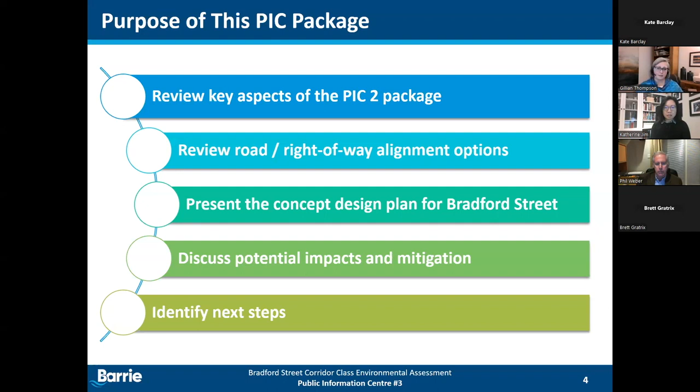So what is this study about? This project reimagines Bradford Street as a future multimodal corridor within the Urban Growth Center. The long-range planning study will confirm and protect the right-of-way required to provide more attractive, accessible, and sustainable transportation options.

These include improved sidewalks to enhance safety and accessibility for pedestrians and mobility device users, new in-boulevard cycle tracks for all ages and abilities with connectivity to the mobility hub and GO and the broader cycling network, traffic operational improvements to enhance safety and opportunities for transit priority measures, and a streetscape design to create a vibrant and attractive street environment that encourages active use.

Given the long-range nature of the study, there are no immediate capital works planned. This project is about protecting enough right-of-way space that the street can serve the needs of the future community to 2051.

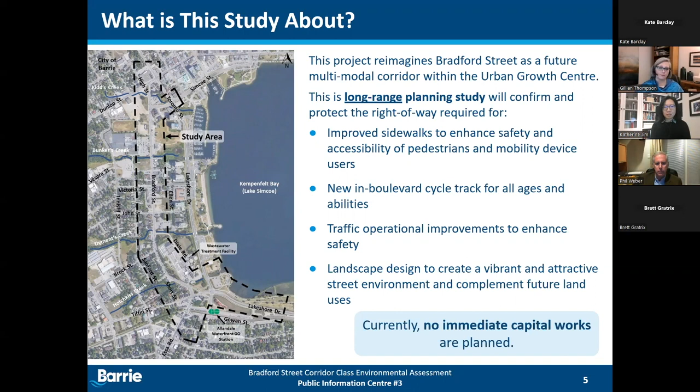The study framework we use here is called the Municipal Class Environmental Assessment, or Class EA. It's a planning and approval process for municipal infrastructure that follows Ontario's Environmental Assessment Act. There are 4 study phases with public, agency, and Indigenous community engagement embedded through the process.

We've moved through phase 1, reviewing the study background, the planning and policy context, and identifying needs and opportunities. In phase 2, we considered alternative solutions to address the needs and opportunities, and we presented all of this information and the decision-making in PICs 1 and 2 in January and June of 2022, respectively. We're now completing phase 3, developing the design concept, and then moving into phase 4, the preparation of the study documentation.

In early 2023, we'll be reporting to Council. We'll be reviewing the study recommendations with Council for their consideration and acceptance. There's an opportunity at that time for members of the public to request delegation status at the Council meeting.

The date of the meeting hasn't yet been set, but it will be advertised in the newspaper and posted on the project webpage. For those who've requested to be on our project mailing list or who have registered for any of the PICs, we'll notify you via email. Pending Council acceptance, a notice of study completion will be issued, and the environmental study report will be available for a 30-day public review period beyond that.

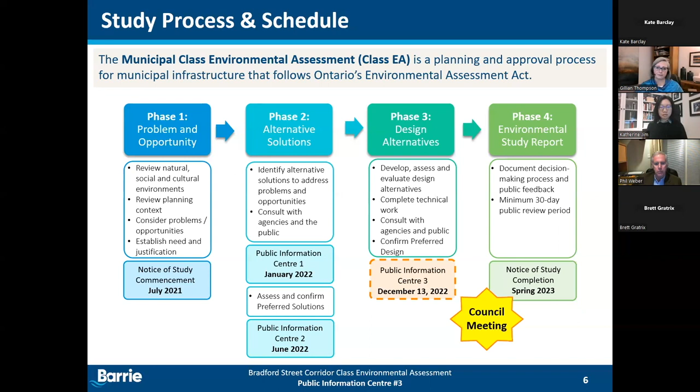The next few slides capture some of the key aspects that were presented at PIC2 in June and provide important planning context for the decisions that we've made since then.

As I said earlier, Bradford Street is transforming and there are numerous approved and proposed developments with more applications to come, and the city expects that the majority of the corridor will be redeveloped. The city's official plan designates lands abutting Bradford Street as high density with minimum building height of 12 stories and ground floor retail and commercial uses.

Bradford Street is the primary transportation link within the urban growth center and is being planned as a complete street that will be integrated with the future community and provides mobility for all users: transit riders, pedestrians, cyclists, mobility device users, and drivers. Overall, we will see Bradford Street shift to a more pedestrian-friendly environment, enabling people to live and work within a walkable community with easy access to public transit to encourage less vehicle use.

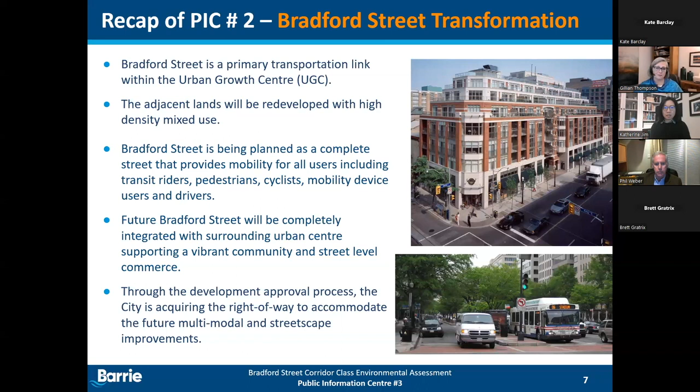At PIC2, we talked about the list of potential planning solutions that we considered to address the needs of future Bradford Street. We looked at do nothing, access management, operational improvements, multimodal improvements on Bradford Street within an expanded right-of-way, reduced travel lanes, and improvements within the existing right-of-way.

And lastly, we looked at the possibility of addressing community needs by improving other corridors. Our recommended solutions were to manage access, improve traffic operations, and expand the right-of-way to address multimodal needs and align with the vision for future Bradford Street as set out in the official plan and the transportation master plan.

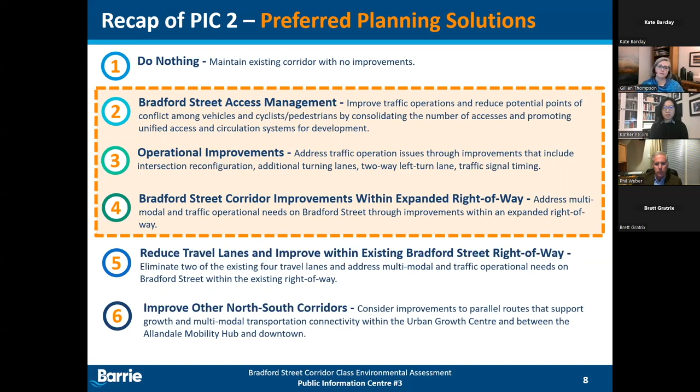Why these solutions? Well, we're demanding a lot from Bradford Street in the future, and we need enough space to accommodate boulevards, cycle track, and accessible sidewalks, street trees, planters, and other landscape opportunities, street furniture, benches, bike racks, pedestrian scale lighting, improved transit stops, future transit priority measures, operational improvements like turn lanes at intersections, and required setbacks for the hydro line and other utilities.

And our recommendation at this time provides the greatest flexibility for the city to respond to emergent technology and changes in travel modes and provision of additional amenities over the next 30 years. So while maintaining 4 lanes now doesn't preclude future decisions to reallocate space within the right-of-way.

And what does that mean? It means in 30 years from now, if we see the shift to active travel and transit that we're hoping for, the outside lanes could be converted to on-street parking or electric vehicle charging stations or an expanded flexible public space. We know that the city may consider a business case for a higher order transit network that includes Bradford Street.

In its upcoming transportation master plan due to start in 2023. So again, we want to maintain that flexibility for future decision making in this corridor with our recommendation.

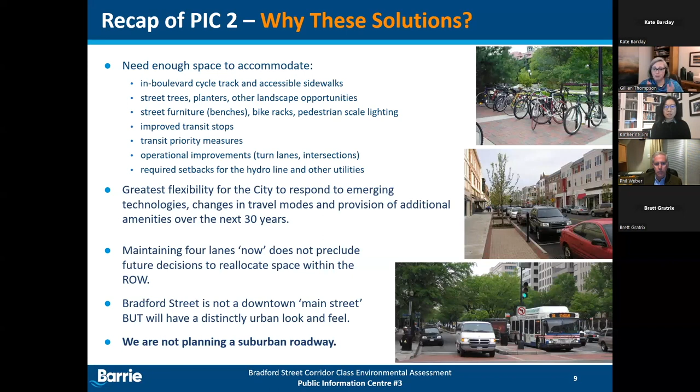So with that point, at PIC2, we introduced sketches of how future Bradford Street could look. And this is one of those sketches. We introduced this conceptual road cross-section to take a closer look at each of the elements that make up the right-of-way requirements. So Kate, this is a bit of an animation.

So let's add the sidewalk, setback, and buffer. Thank you. Now let's add the cycle track and then the boulevard and curb.

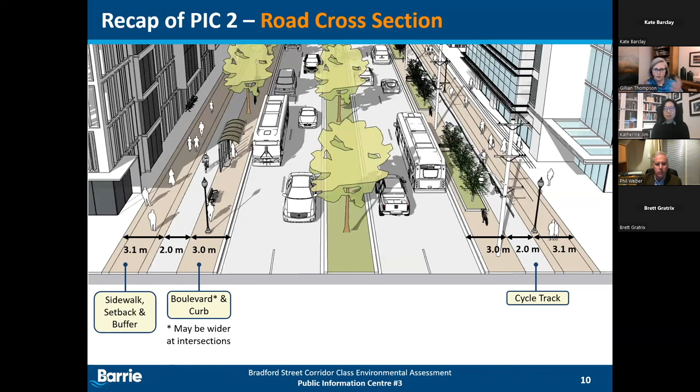Great. The boulevard space will be occupied by those street furnishings, landscaping, the hydro line, transit stops, and pedestrian scale lighting, and those all contribute to the vibrancy of the off roadway areas.

Now let's add the travel lanes. We've accounted for a narrower inside lane and wider outside lane to better accommodate transit vehicles. And finally, the median area is an opportunity for street tree plantings mid-block with space for turn lanes at intersections.

As you can see, we are illustrating the hydro poles, and we've met with Alectra to talk to them about the project. The city may, in time, explore the feasibility and cost implications of burying the hydro. This isn't a decision that we'll make in this EA, but it will be something that's considered in future and in the context of land redevelopment.

In PIC2, we also reviewed the options for the Tiffin Street intersections at Bradford Street and Lakeshore Drive. Alternative 1 involves some reconfiguration and improvement while maintaining signalized intersections. Alternative 2 considered a pair of roundabouts with a mid-block pedestrian cyclist crossing to provide that connection to the mobility hub and GO. Each alternative offered distinct benefits and challenges to different road users.

With all things considered, and in this particular context, we believe the signalized intersection design is slightly preferred because it's perceived by pedestrians, cyclists, and mobility device users as being more familiar, easier to access and navigate. It provides more direct routing for those active and mobility device users, and generally better accessibility for the hearing and visually impaired. It's also more compact and more desirable from a human scale perspective, especially given the intensification and redevelopment that's going to occur around this area.

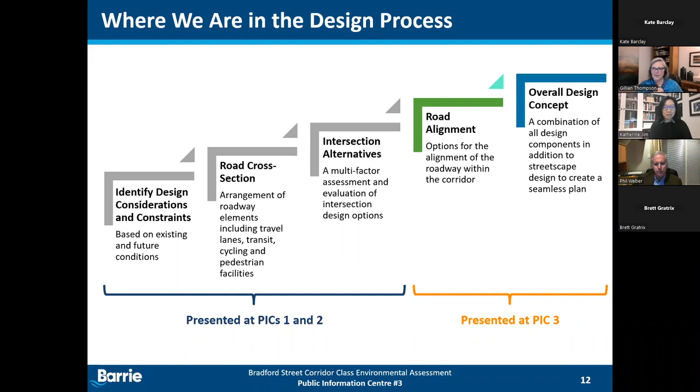Great, thanks, Gilly. For the proposed improvement on Bradford Street, we have assumed that our expanded right-of-way is going to occur largely around the center line of the road, to offer a balance to potential property impact on either side of the road itself.

Now, there are some localized constraints that we do need to respect, such as no impact to the wastewater treatment facility, and some of the development plans may be in more advanced stages as well. So in those cases, the expanded right-of-way may be shifted to one side of the road, and you'll be seeing that later in the presentation.

Also note that we have applied the typical cross sections that you saw in earlier slides. But in the future, the city may decide to look for opportunities for slightly narrower cross-sectional elements in constrained areas. Again, for the purpose of the EA study, the proposed property line is shown for the 34-meter right-of-way, to allow that flexibility for the city to make minor modifications in the future as required.

Now, one of the focus areas within our study area is in the south end, around the Tiffin Street intersection. As you saw in an earlier slide, we evaluated between a roundabout and a signalized intersection, and we're proceeding with the signalized intersection option.

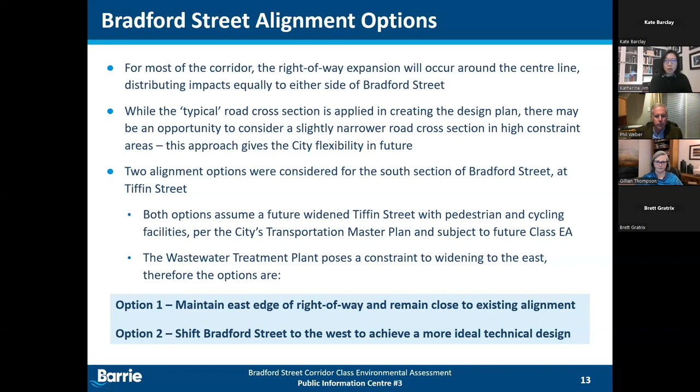Option one is to maintain the easterly edge of the right-of-way, staying close to the existing alignment of the road itself. Option two, we're looking at potentially shifting it to the west to achieve a more ideal technical design.

Currently, Bradford Street is posted at 50 kilometers per hour, and it is assumed to remain the same in the future. Recognizing the urban nature of the corridor, we have assumed a design speed of 60 kilometers per hour, which is typical design standard, generally 10 to 20 kilometers per hour above the posted speed. That means we're applying a set of design parameters in terms of the curve on the road and the associated sight line for this particular design speed.

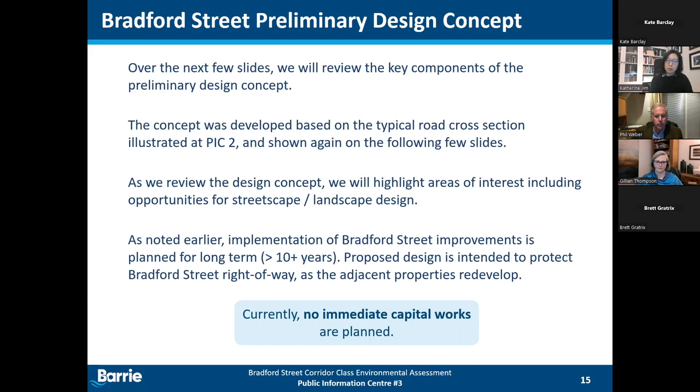As we know, there are many ongoing active developments in the adjacent properties. If we don't take the opportunity now to identify the property protection, there may not be enough space in the future to give the city flexibility in implementing amenities in an urban corridor, again, as you saw in the previous cross-section. So with this, I'm going to ask my colleague Kate to bring up the design concept plan.

This is the design concept plan from a high level for the improvement on Bradford Street between Tiffin Street and Dunlop Street. This is a top-down view, and later on we'll zoom into the corridor itself. This is just an overview to highlight some of the colors and what they mean.

On the plan, the future development plans are shown in red hatching, based on what we found on the city's website. They're all in different stages of approval, but this shows that the corridor is very active and more development plans may be coming.

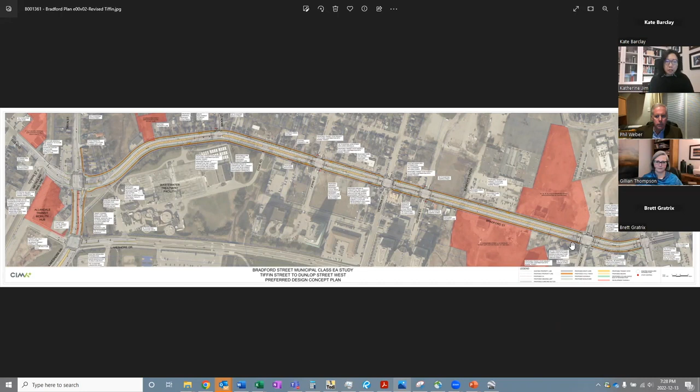In the middle of the plan, the gray area and lane marking shows the 2 lanes in each direction, same as existing, generally keeping with the existing center line, other than at the Tiffin Street intersection area, where there will be a shift to the west, as discussed earlier.

As a concept, shown in the typical cross-section, there may be a median provided in the middle of the road, shown in yellow, where landscape elements may be provided. This is conceptual only and will be subject to future development application and approval on access management.

The boulevard on both sides of the road are essentially new elements. As you zoom in, you'll see the concept includes a 2.5 meter boulevard space in light green. Behind the boulevard is a 2 meter cycle track in orange, and the sidewalk is adjacent to the cycle track on the outside. The boulevard space, cycle track, and sidewalk are on both sides of the road.

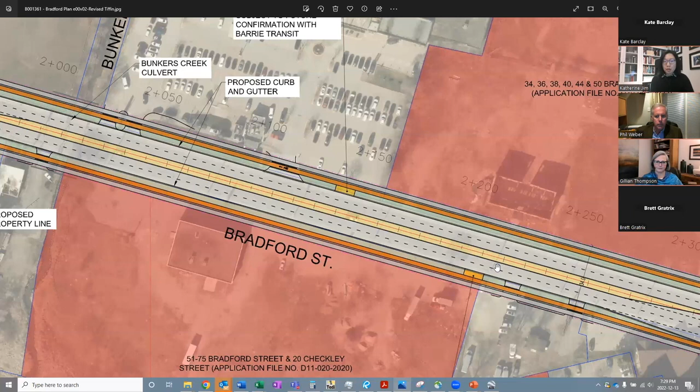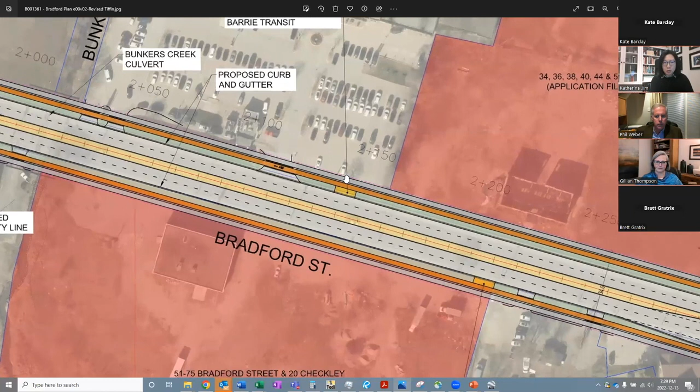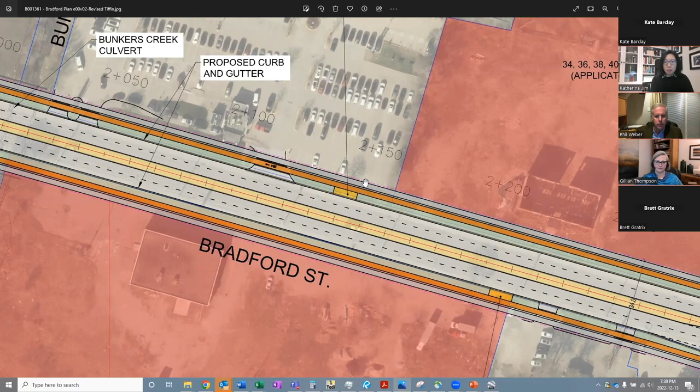You'll see the existing property line in blue, and the proposed right-of-way line marked in a dashed pink or purplish color. The land between the two lines reflects area required for the expanded right-of-way and these new elements. I'm going to walk through the main features starting from the south end of our study area at the Tiffin Street intersection.

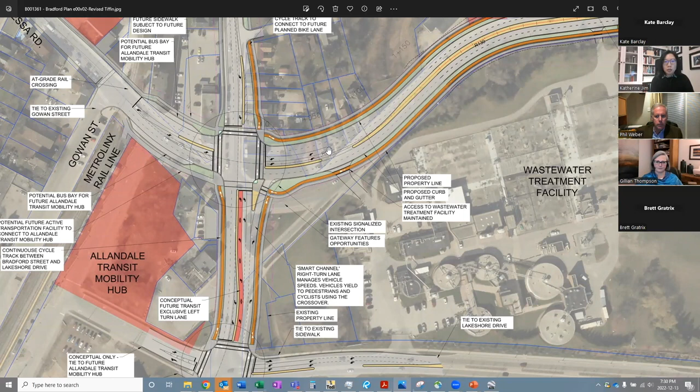Starting at the Tiffin Street intersection, we already talked about the shift to the west. In the southbound direction, we're providing a double left turn, and you'll see the transition of the cycling facility on Bradford Street to a multi-use path on the west side of the road, and a sidewalk on the east side. To orient ourselves, north is to the right of the page, south is to the left, east is the bottom, and west is the top.

At this intersection, we have space allocated for cyclists to park and wait for the correct signal to cross. If you zoom into the intersection, you can see the small green space protected for cyclists when they cross the road—this is where they can park and wait for the right signal before crossing.

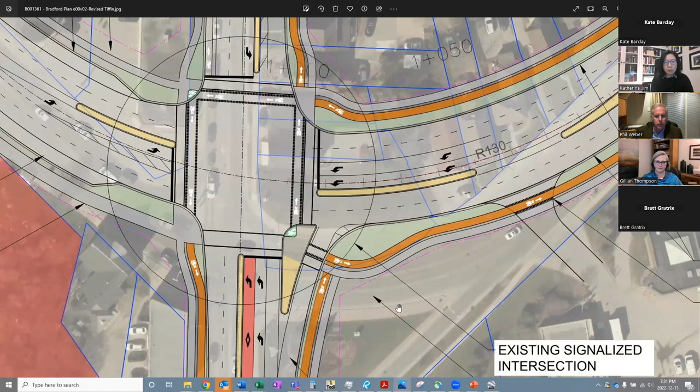Zooming out, in the westbound direction at this intersection, we're also seeing a potential concept for an exclusive transit turn lane—the middle lane hashed out in pink. This is, once again, a potential concept for an exclusive transit lane going into the Allandale Mobility Hub.

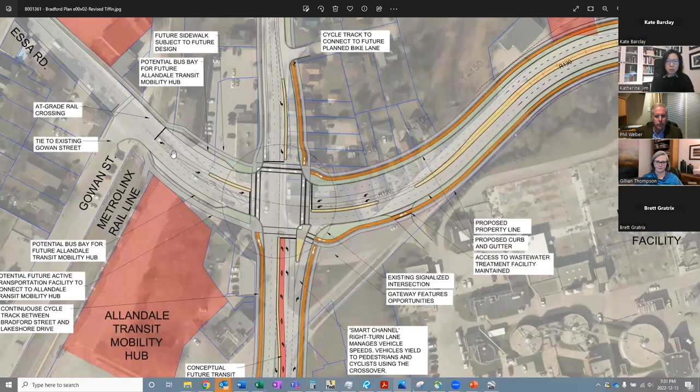On Essa Road, south of Tiffin Street, there are opportunities for a bus bay, depending on what the Allandale Transit Mobility Hub is planning to be. On the plan, we've allocated space for a bus bay where the bus can pull in for people coming in and out of the Allandale Mobility Hub.

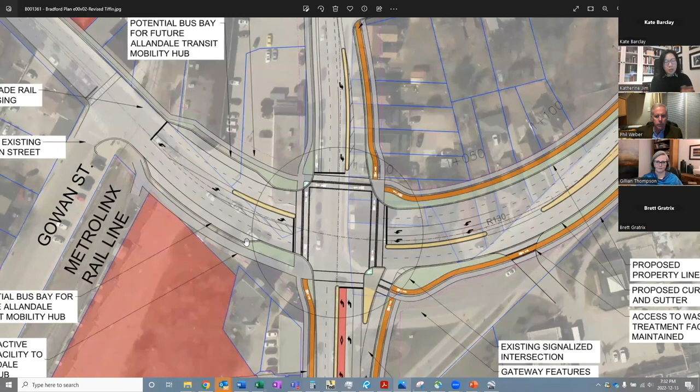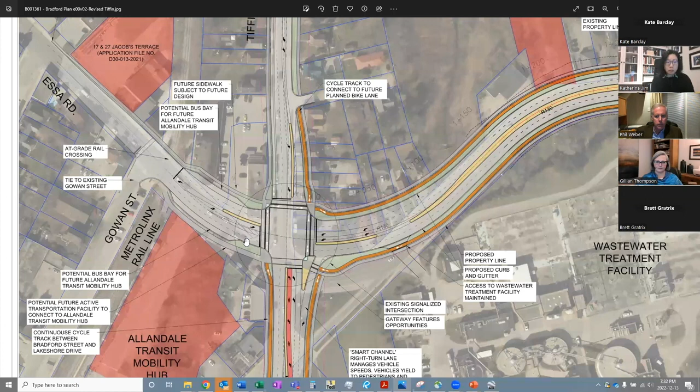Note that by the time the road approaches the existing rail track, it will generally be reaching the existing elevation again, so we're not looking at major reconstruction of elevation at the intersection itself.

In the northeast corner at Tiffin and Bradford Street, because of the shift in alignment, there's an opportunity for a gateway feature and other landscape elements.

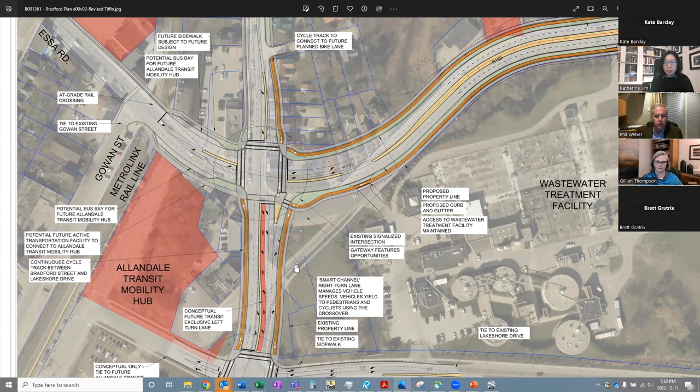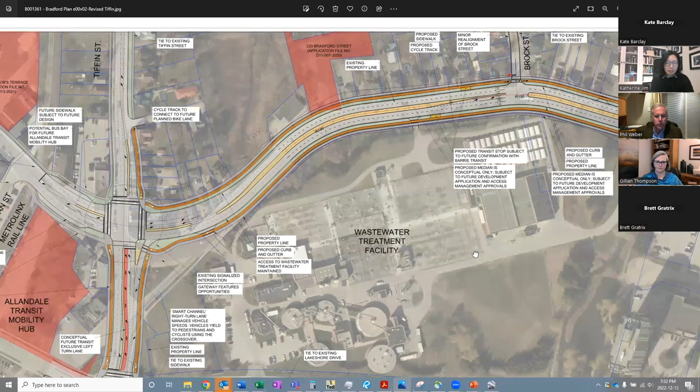As we head north from here, we see the water treatment plant on the east side—this aerial image is quite clear and shows the plant itself. The existing access into the water treatment plant just north of Tiffin Street will remain. The treatment plant is a constraint, so the expansion of the right-of-way will largely be to the west in this vicinity, all the way up to just past Brock Street. So for this whole stretch between Tiffin and Brock Street, the expanded right-of-way will generally be to the west.

We do take note of the location of the new right-of-way line for Bradford Street and the associated property impact. But again, we want to emphasize that this corridor is for the future, and improvement of the road will be driven by redevelopment.

You will see that we have made some notes of transit stop locations. For example, the one just south of Brock Street, you're going to see the little orange square there. Now, these locations are based on conceptual input from Barrie Transit, recognizing these may change in the future, but essentially the footprint required for the transit shelter itself may be within the space of the boulevard.

Now, at Brock Street, this is our first intersecting side street. There's going to be a minor realignment to the road itself for better geometry and better sightline when turning into Brock Street.

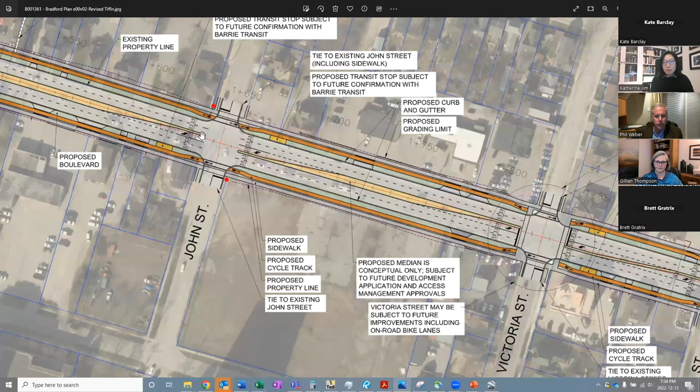At the John Street intersection, Kate, if you would just zoom in, and also similar at other side streets, you will see as an example that we have a cross ride going in the north-south direction. That's where the cursor is. You can see the marking on the street itself.

That means these cross ride facilities allow cyclists to continue their ride on the road without dismounting. But you will see that the bike facility from Bradford Street will transition to the on-road facility at the side street. However, the sidewalk will be able to continue as you turn into the side street.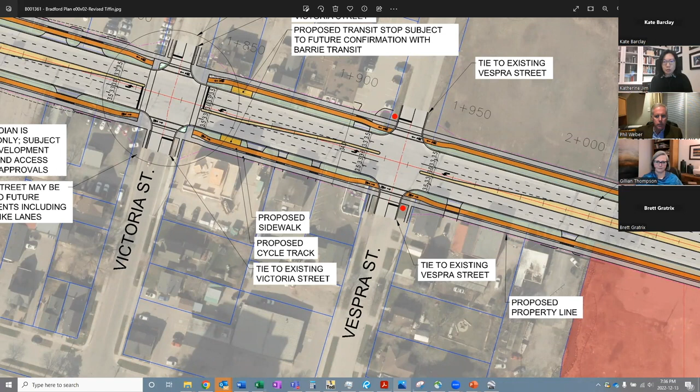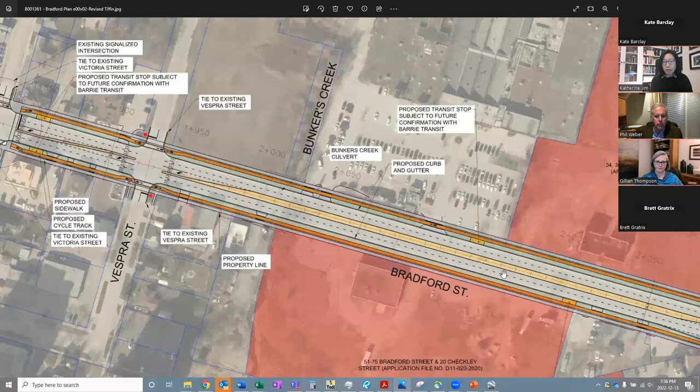As we continue to travel north and approach Simcoe Street, you will see the proposed development hatched out in red on either side of the road. Once again, the intent of this concept plan will serve as input when reviewing development applications that will allow the city to explain how much of the roadway elements is required to be protected within the road right of way, and how far the setback is required from the development property.

Now at Simcoe Street, we do recognize at that particular intersection there will be a future west leg into the development. And we're only showing a very short stub in the concept, again recognizing that the full development of this intersection will be subject to the future development plan.

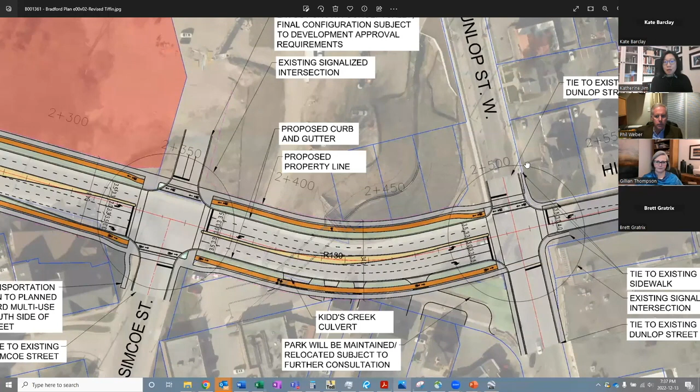As we continue to travel north on this plan, we're almost reaching our northerly study limit at Dunlop Street. Our outside lane traveling north will become the right turn lane and drop off as we head onto High Street, because High Street is a one lane in each direction street. So we will have to drop one of the two lanes, but we will still have a left turn lane being provided at that intersection.

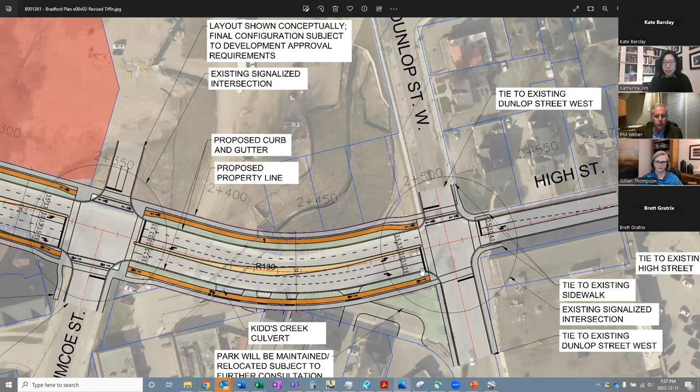The existing channelized right at Bradford and Dunlop is proposed to be removed. The driveway access of those properties on the east side will be replaced with a laneway, and the existing parkette itself, also in the southeast quadrant of Bradford and Dunlop, will be shifted as well.

In detailed design, there will be an opportunity to look at how some of these features or some of the material that are within the parkette may be reused.

Now, this is a very quick overview of the preliminary design plan. There is lots of information, and I'm sure it will take some time to digest, and there will be some questions towards the end of the presentation as well. But certainly, the takeaway message too is, once again, this is a concept plan that shows the future expanded right of way that may be planned to accommodate not just for vehicles, but for cyclists, for pedestrians, for transit, as well as opportunities for landscaping.

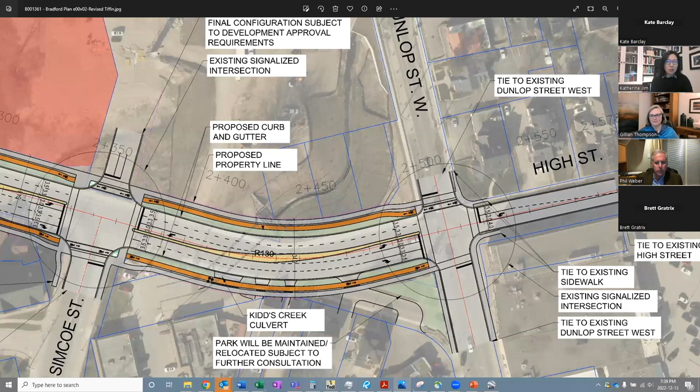Particularly in the area of Tiffin Street and Dunlop Street, there are potential for gateway features. So with that, I'll pass the presentation back to Gilly, who's going to show us a few renderings on how Bradford Street may look and the landscape design elements.

Thanks, Katherine. And Kate, before you leave that plan, I used the term access management earlier in the presentation, and it's sometimes hard to understand what we mean by that, but this plan view gives us a really clear picture where we have these stretches of Bradford Street with that continuous median and we're not showing any entrances to the development areas. There will be entrances, but our goal is really to try to reduce the number of individual entrances and try to consolidate entrances into the new developments.

This is important because when we think about the objective of getting walkers and cyclists out into this corridor, we want to make sure they're able to move freely through it without numerous stopping points at individual entrances and driveways. So when you heard me talk about access management as one of our recommendations, that's what we're talking about: keeping those entrances consolidated, reducing the overall number and the number of potential conflict points, so the corridor can operate as intended for active users.

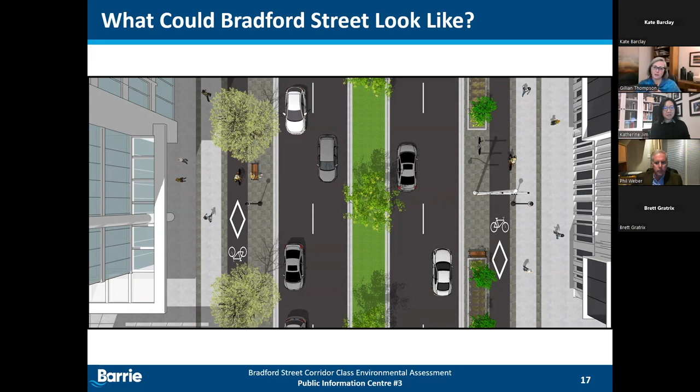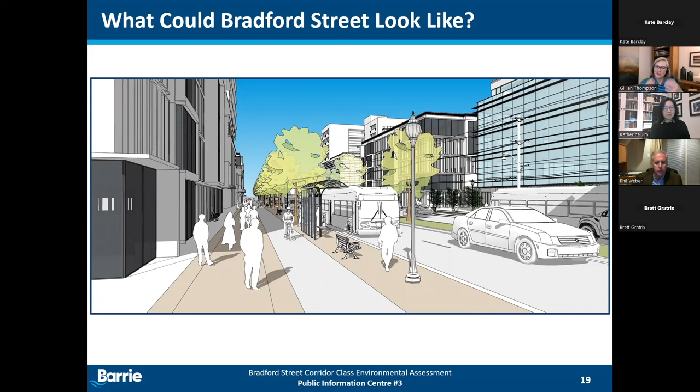And again, the same idea with opportunity for trees in the median, trees in the boulevard, the trees having the benefit of, you know, in terms of thinking about climate change, in terms of shade, and lots of benefits there.

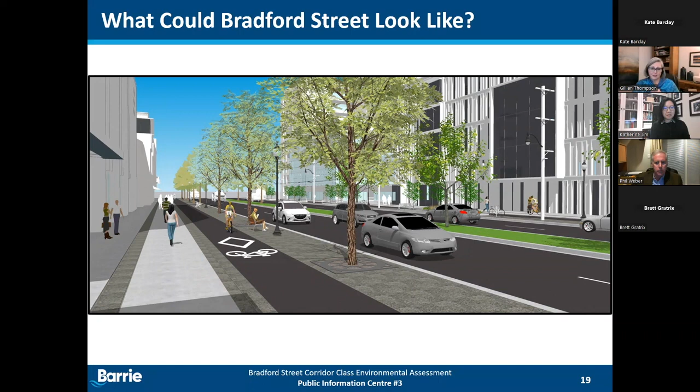Good. Okay, so Katherine alluded to this. In the next phase of design, a streetscape plan will be developed that lays out all of the aspects of the landscape plantings, the furnishings, pedestrian scale lighting, and gateway features. The environmental study report, or EA document we're producing at the end of this study, and the design concept that will be part of that report, will reflect the design intent and the principles to be considered in future.

We really want to make sure we're communicating the vision and intent of that streetscape plan for future designers. In terms of inspiration, we see opportunities for a really visually impactful gateway, like the Thunder Bay sign - Kate, if you just want to float your cursor over that. That's envisioned at the south end, adjacent to the wastewater treatment plant, where we're gaining a little bit of space there. We could have enhanced intersection areas at the primary intersections at Tiffin Street and at Dunlop Street, and Kate's showing a visual there of what that looks like.

We kind of already have those areas, it's just maintaining and enhancing those - street furniture examples, and even maybe a transit stop design. There's so many great opportunities to create that vibrant and unique corridor along Bradford Street, and we certainly want to create that excitement for that future vision in this plan.

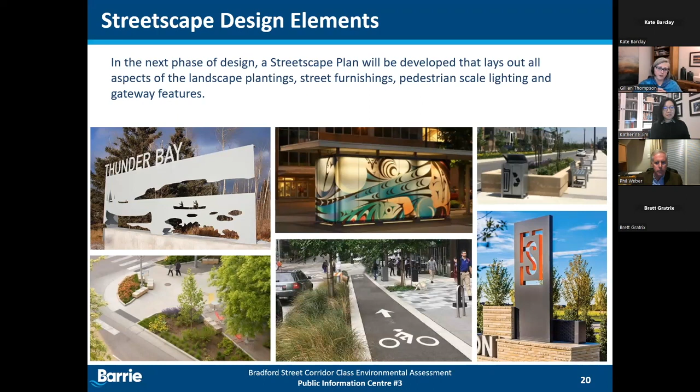We really like the idea of accessing that new green space in the future community there, and see that as a real benefit. As Katherine mentioned earlier, Stephens Park will be shifted slightly as we reconfigure that channelized right. The intent really is to take the hardscape, the granite, the stonework, and reuse and relocate that. Depending on the timing and the condition of plants, the intent would be to salvage and transplant as many of the plants as possible from Stephens Park.

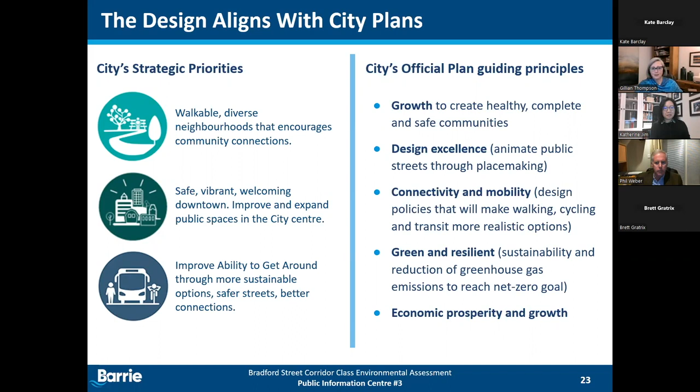With the design concept we shared and the principles we've set out for future detail design, the focus will continue to be on accommodating planned growth in healthy, complete communities, creating a benchmark in design excellence through making Bradford Street a prominent place in the city center - a true destination with interesting aspects to draw people in, and connectivity and mobility, green and resilient infrastructure, like I just mentioned, and supporting economic prosperity in creating Bradford Street as that desirable destination.

With the design concept complete and the future right-of-way requirements identified, we can now move on to completing the impact assessment, and that'll be our next step. In doing so, we consider potential positive and negative effects to socioeconomic, cultural heritage, and natural environments.

We'll be looking specifically at drainage and stormwater, groundwater source protection, built cultural heritage and archaeology, natural environment, property and access, and climate change considerations. We'll also be recommending, at a very high level, preliminary mitigation measures, and we'll be making commitments to future work, ensuring that all future regulatory requirements are met and future permits and approvals are clearly identified.

We keep saying that this is a long range study, and we really see the commitments to future work as being so important in this study to guide further design and implementation in the future. So all of this will be documented in what we call the environmental study report, or the EA document.

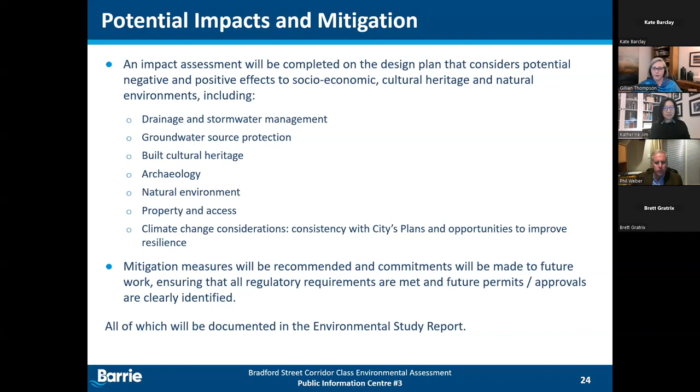So in terms of property impacts, what if your property is impacted by the project, and what does this mean? For properties that will undergo redevelopment, the recommendations in this study are for long-term protection. This means if a developer was to purchase your property or develop a property they own, that developer will need to convey to the city the identified road right-of-way as a condition of approval. This is a typical requirement and common across the city and in growing municipalities - this is how rights of way are conveyed to municipalities through that development process.

For properties that do not undergo redevelopment, when the city proceeds to implement the project, the city will purchase the required properties at fair market value. There's a whole realty process around that that we won't get into here, but certainly if you're a property owner and you've got questions, we can take those conversations offline.

Again, the project isn't budgeted in the current 10-year capital plan. But if you are a property owner and have more questions about the project and how it relates to your property, please reach out to Brett, the city's project manager, after this meeting, and we can set up a time to have a conversation about your case. Just in the interest of time here tonight, we know there will be interest, but we don't want to spend...

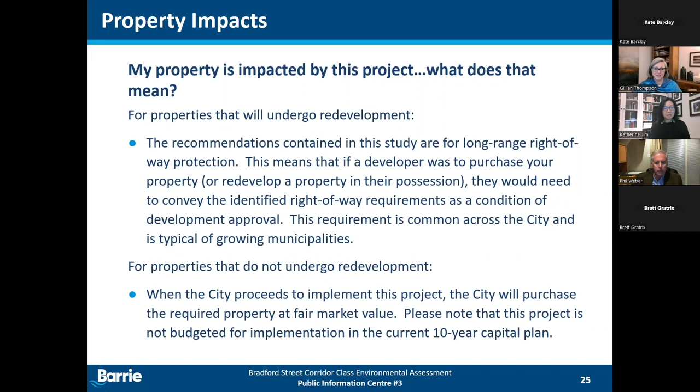...general time focusing on property by property questions. So follow up with us after - we're happy to have those conversations, and we'll review Brett's contact information at the end of the presentation. Thank you for sticking with us, it's taking a little bit longer than we had anticipated, but lots of information.

In terms of next steps in the EA process, the project team will review and consider all the feedback we receive from the public, agencies, and Indigenous communities. We'll refine the design concept in light of the feedback where appropriate, complete the final impact assessment with preliminary mitigation recommendations and commitments, prepare the environmental study report to document everything, and prepare a staff report to council containing the study recommendations for council's review and acceptance.

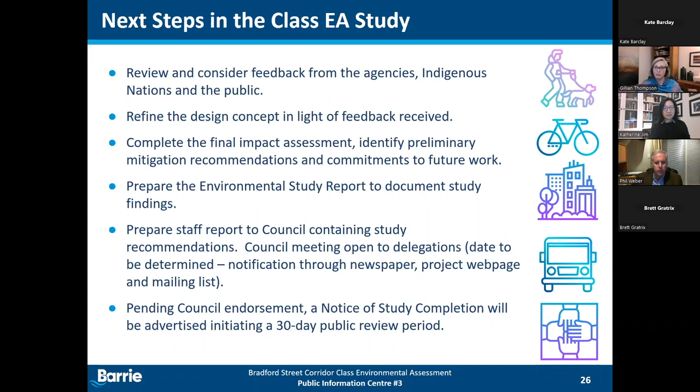That council meeting will be open to delegations. The date is to be determined. Again, we'll be notifying through the newspaper, the project webpage, and if you're on the mailing list or have registered for any of the PICs, you'll get a direct notice. Pending council endorsement, we'll issue a notice of study completion that starts the 30-day public review period where you have a chance to look at the entire EA document.

Beyond this Class EA study, we wanted to talk about this again because of the long range nature of the study. The shelf life for a Class EA study is 10 years unless any aspect of the plan has been implemented. This Class EA is about long-term protection, but the implementation of the design will be really driven by the pace of redevelopment. So if redevelopment advances quickly, the implementation timeframes may be accelerated.

The capital program is reviewed each year by council, and priorities are set based on what's happening in the city, as various pressures and priorities shift from year to year. So if development occurs at a more modest pace and 10 years elapses with no part of this plan being implemented, then the Class EA study will be refreshed or updated through what's called an addendum. The addendum basically confirms or refines the design plan relative to the transportation and planning context of the day, and it would also include a full consultation program similar to this EA study.

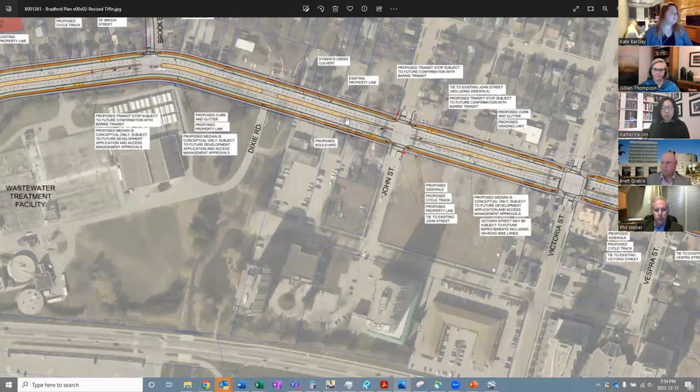Our design concept plan is showing the expanded protected right-of-way on Bradford Street only. Property on the adjacent parallel street is not expected to be impacted directly as a result of the improvement itself on Bradford Street. And then our next question is actually related to an element of how we may use the right-of-way space.

So for example, whether the consideration of automatic public toilets or even restroom areas may be considered in our right-of-way layout. So again, I think at this time we haven't fully explored the detail of what may be some of the potential elements in the right-of-way, but that's certainly an interesting, good suggestion.

Yeah, thanks Brett. Yeah, that's right. Those are some of the emerging technologies and things that we will be grappling with accommodating in the future. I think you're right about that. So we haven't addressed that specifically, but this kind of falls into that category of, we know there's things coming that will be looking for space in the right-of-way.

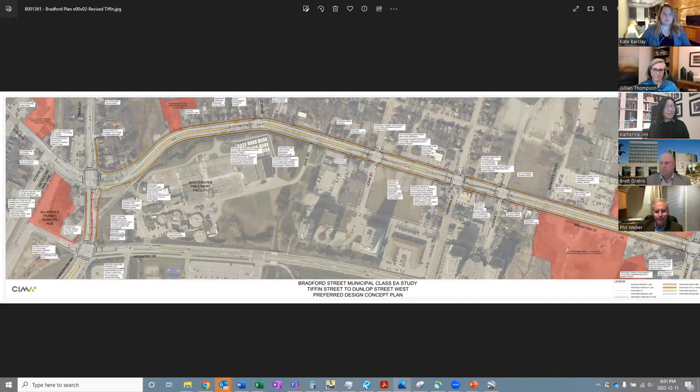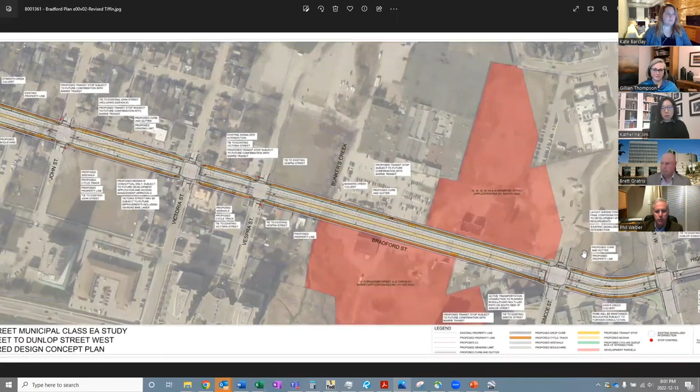Good question, thank you. And then the next question is making reference to a meeting with the consultant for the proposed Performing Arts Center. So a meeting happened last week, and it noted that the architect advised that Simcoe Street itself would be extended to the west of Bradford Street and disappear, which contradicts our plan. So I think in this case, we do acknowledge that there will be a different type of development happening on the west side of Bradford Street, with Simcoe Street being extended. So we do recognize that.

But at this time, once again, I think the plan is certainly very active. I don't think there's a specific approval process at this very moment, so I think we do acknowledge that the road itself will be extended.

Gilly, did you want to? Well, I'll just add to that.

We'll make sure that what we're reflecting is current as of when we finalize the report. Your point's taken that things are very fluid right now with the development applications, and essentially when our report is finalized, we'll have to timestamp it and accept that it reflects known conditions at the time of finalization. Thank you for the heads up, and we'll track that.

We'll follow up with Brad and city folks on that as well. Just to clarify, the west leg of that intersection is more of a placeholder. There will be access of some sort, but that's still being worked out. We'll finalize that based on the best available information at the time, and it'll be an ongoing live discussion with the development parcel on Bradford Street and the Performing Arts Center. This isn't tying them into a very specific design at this point, just a general concept.

Thanks, Brett. The next comment is about traffic, asking if we can discuss the traffic trade-offs between Bradford Street and Lakeshore Drive. I think in this case it's really looking at the overall traffic operations of the network in the area between Bradford Street and Lakeshore Drive itself. Phil, maybe you want to jump in and comment a bit on the traffic aspect.

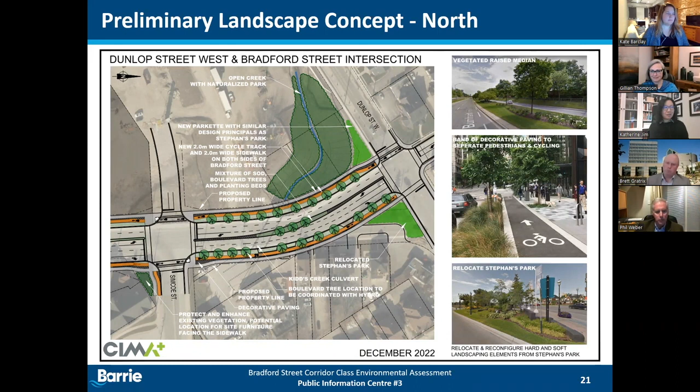Mute, Phil, you're on mute. You're on mute. Oh, still on mute. Sorry, third time's the charm.

I think we kind of missed the comment about the welcome sign for downtown Barrie BIA, but yeah, that's just a general comment.

I think the trade-offs for Bradford Street and Lakeshore are that Lakeshore is more the scenic drive, and Bradford's going to handle the heavier traffic, downtown to the Allendale GO hub. That's kind of the vision, so Bradford's going to be more of the heavy duty traffic spine. It's slated to handle a significant amount of traffic, and that's what the modeling is going to show. We expect it's going to be a fairly functional corridor.

Having said that, both corridors are going to handle a fair amount of traffic, and there's only so much we can do to disperse traffic between the two. So traffic's going to go where it's going to go, and both roads are going to be busy commuter corridors no matter what we do. No matter how much capacity we put on one versus the other, traffic's going to kind of equalize in terms of travel times in the AM and PM peaks. Really, that's what they're going to serve in terms of commuter travel times.

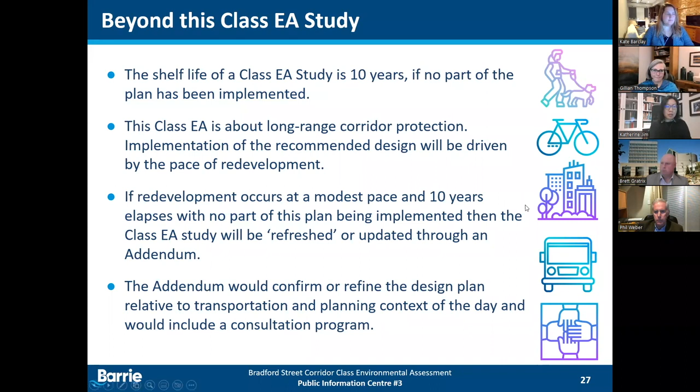Thanks, Gilly. Back to more questions related to community impact. We have a question about the potential effect on the quality of life of residents living on Sanford Street, since buildings that are 3 stories high will create a shadow effect on family homes, and this could be a problem.

I think that's more related to the future planning of the corridor itself, so Brad, perhaps you want to take this one. Yeah, it's more of a land use planning question. This is focused on the corridor in response to the official plan, which is the parent document the city uses to build upon children plans like master plans. So the land use planning comments are probably best directed towards the official plan, which was just updated. Our zoning bylaw is coming out next, which will be the next opportunity in Q1-ish on buildingbarrie.ca to provide feedback on building height and massing. But we can definitely take that comment and pass it on to our planning department.

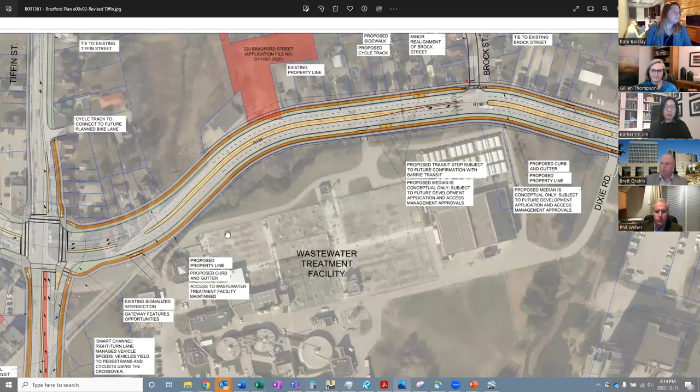Thank you, Brad. The next question is related to the Bradford and Tiffin Street intersection. The comment is that the right-hand slip lane is being maintained at the intersection, and these slip lane designs are known to promote high speed and create a dangerous situation for pedestrian and vehicle interaction. I think we're talking about the channel going westbound from Tiffin Street onto Bradford itself. Maybe Phil, I'll let you take this one.

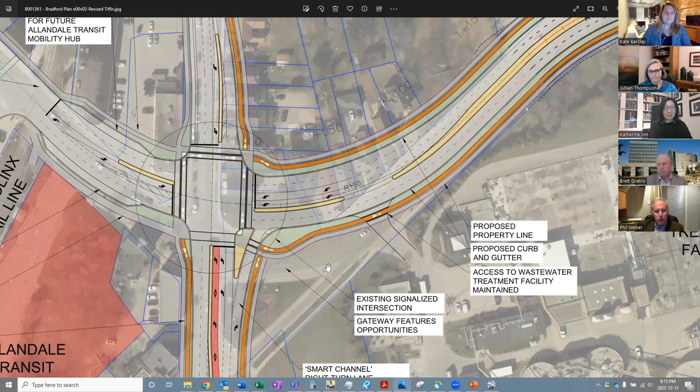Sure. Yeah, we've changed the design of the slip lane. Before it was much broader and wider, which promoted high speeds. We've changed it to what we call a smart channel design, which ends in a yield condition, so drivers come to a yield or almost stop, look to the left, and make a right turn. But this isn't cast in stone. We do need some sort of exclusive right turn because the right turn volumes are really, really high, so it could be a smart channel design like this, or just a right turn lane, an exclusive right turn lane.

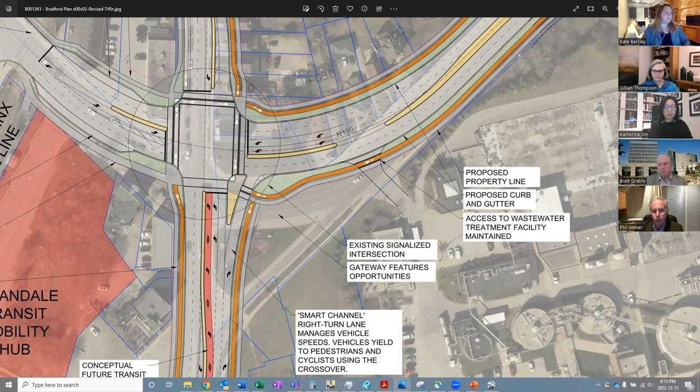This is what we've done at Tiffin and Lakeshore, where we're just showing a right turn lane. So it could be either a smart channel design like here, or a right turn lane design like at Tiffin and Lakeshore. Here we're showing just an exclusive right turn lane, more because of the geometry of the intersection coming in at an angle, so it's easier to design a simple exclusive right turn lane than a smart channel design. But these are just preliminary designs. Detail design is when you make the final decision on these types of things. So for now we're showing one design at one location and another at the other location, but at detailed design you'd make the final decision as to which design you go with. These aren't cast in stone at this point.

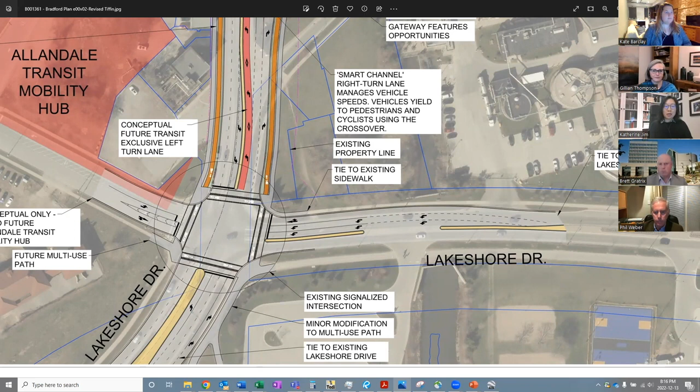Great, thanks Phil. Our next question is related to the dimension of our cross section. The question asks about the width of the travel lane that's out there now, and whether we've considered a 3-meter lane for the future design, since it's a more urban road with a more urban feel, and a 3-meter width could provide greater traffic calming, safety, and pedestrian access. Just reflecting back, our typical cross section right now shows an inside lane of 3.3 meters and an outside lane of 3.5 meters.

So maybe I'll start off with the answer. As Gilly mentioned, the cross-sectional element at this point is what we're proposing as a concept, so in the future it does allow the city to make certain modifications to the cross-sectional element dimensions. In this case too, we need to think about what the lane needs to accommodate, whether, for example, a transit vehicle has certain requirements when it comes to lane width. So we do need to take that into consideration as well. Brett or Gilly, maybe you guys want to jump in.

I think you've explained it well. We're being a bit cautious about being overly aggressive, recognizing we're not moving to implementation. There's going to be steps in between. One concern would be if we move to higher order transit, it's just accommodating that width. We don't want to tell a story where we're demonstrating a surplus of width. These are reasonable lane widths, not saying they couldn't change. But that's a real concern, that next step of transit, and what that needs in terms of right-of-way space and lane configuration, which may get bigger depending on what that looks like. That would be subject to justification through our transportation master plan update. But the biggest take home is none of these dimensions are fixed in stone, and there will be adjustments closer to implementation, based on the context of the day on the corridor.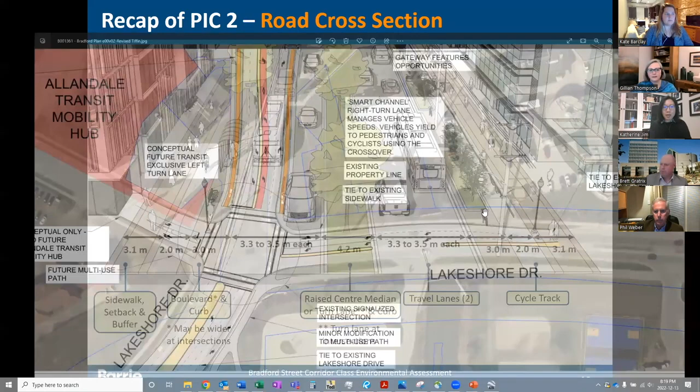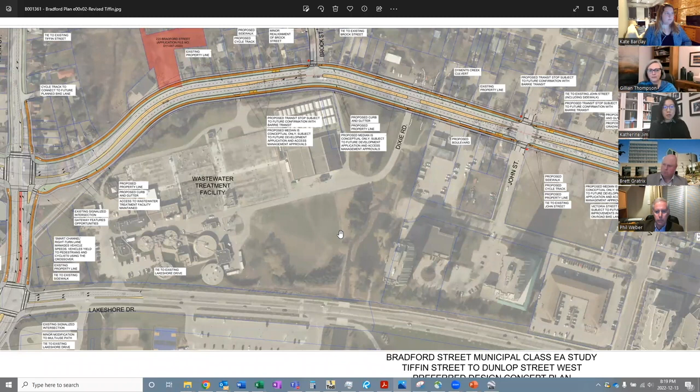Great, thanks Brett. Our next couple of questions relate to the intersection itself. It's asking whether a traffic light is actually needed to safely cross Bradford Street at Brock Street. Right now, pedestrians will need to go northbound to use the northbound bus stop. They will have to walk about 400 meters south or 500 meters north to safely cross. A similar comment is about crossing Bradford Street at John, which is also a challenge, and why stop signs are still being recommended, except at Victoria.

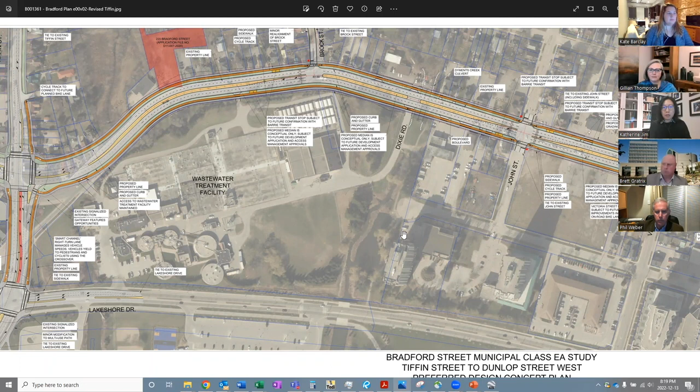I think, to kick us off, the signalized intersection at Victoria is an existing signal, so that is being remained. At the other locations, maybe Phil you can jump in, from our traffic analysis we have looked at the operation at these intersections as well, at John and also at Brock Street in particular. I'd have to dig up the traffic report, but I believe in the future these intersections will be signalized. So it's just a matter of at what horizon period the conversion would happen.

Okay, so on our plan we're showing it as a stop sign, but in future the intent is to signalize them. But that doesn't happen right now—it doesn't help those people that are trying to cross the road, I realize. We'll take that comment back, because that is a long stretch of roadway. So thank you for that feedback. That's great feedback, thank you for that.

Maybe this is a related question, is how is the design aligning with the city's goal of Vision Zero?

Yeah, that's a great question. I think the big improvements are multifaceted, with creating safe space for pedestrians and cyclists as the number one thing we're doing here. Right now we have curb face sidewalks, which is a lower level of service. Probably if you're looking at an active transportation level of service rating, it would be on the bottom end of that scale, where we're advancing that to the highest end. And then moving with a fully physically separated cycling lane is again a very high level of service. Moving that farther away from the travel lane as much as possible even pushes that higher. So making sure we're taking care of our most vulnerable road users is the most important part of Vision Zero.

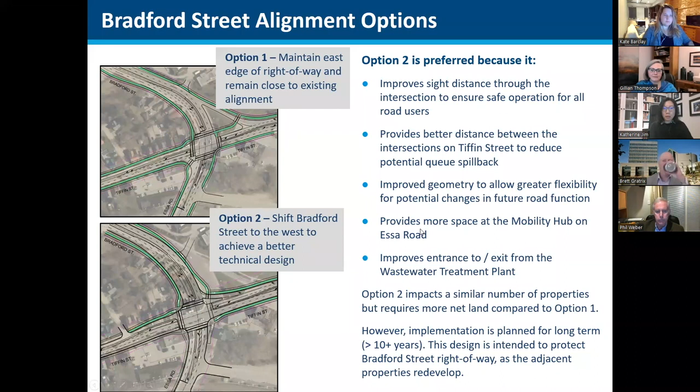We have a couple of questions regarding our road element itself. The first one is a comment suggesting it would be helpful to make one of the car lanes a dedicated transit lane, and asking whether that's an option. As Gillian pointed out, the city will be carrying out a transportation master plan in 2023, and the question of potential higher order transit is intended to be answered at that time.

I'll add to that, and Brett can jump in. With the current transportation master plan, the option of having HOV, high occupancy vehicle, or a transit priority lane for that outside lane was identified even in the 2019 transportation master plan. So that's definitely on the radar, although we haven't shown it in our typical cross section. The intent is there, recognizing the possibility of those outside lanes becoming dedicated transit lanes.

That goes back to some of the rationale when members of the public early in the study asked, can you reduce this to two travel lanes and make improvements within the existing corridor? That desire to have dedicated transit lanes to encourage ridership and transit efficiency was certainly part of our decision making at that time. So it's a great suggestion, and the city's been contemplating it, and this plan protects for that.

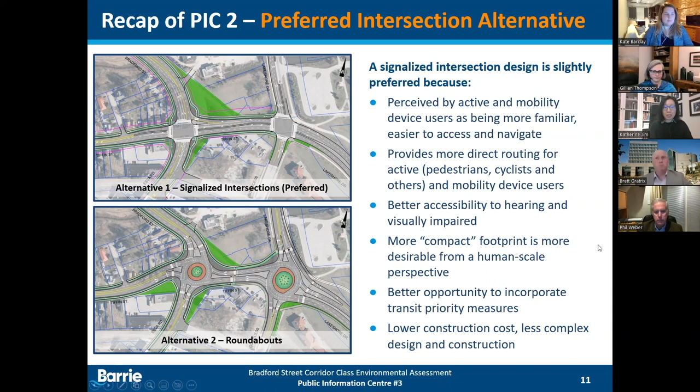Okay, thanks, Phil. We have a comment here asking whether Barrie would consider not having as many turn options through the boulevard, and instead having U-turn lanes at each intersection for those needing to access the opposite direction. Brett, maybe you can comment on the city's experience.

That's a comment we can take back. One of the challenges is it does take more right of way, that's probably the biggest barrier, but that is a potential solution to the median barrier challenge. There is a grid network in that area as well, recognizing there's pros and cons with that. But that's something we can take back and have a look at, while being very cognizant of the feedback we're getting about not creating more right of way. So it's a delicate balance for this corridor.

So our last question this evening is asking about who's going to be paying for the proposed improvement, and will this result in higher property tax?

A lot of this work is attributed to growth, so this will be captured in our development charges study. It is today, but not to this level of urbanization. When we see the development happen on this corridor, as we envision through the official plan, the business case should be there to justify the investment in this corridor to create that pedestrian-friendly space. What we're seeing from internal feedback and our external consultants is that making that investment in the public realm and active transportation does help offset investments in additional lane widening, keeping the corridors a bit narrower. So it's important to keep the financial conversation in context of the broader network, as a value proposition of what this project would bring. So that's a great question.

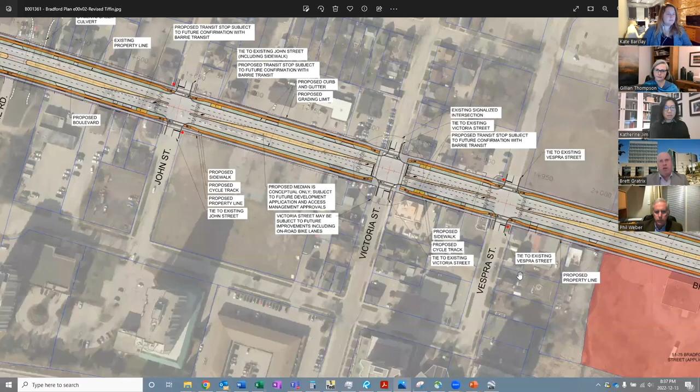That's a challenge with just the road network in the downtown, and I don't think there's going to be a silver bullet solution to make that better. So that would be referring to the westbound move, that westbound left onto Lakeshore backing up, and then the challenge making that straight through move on Simcoe to connect to Bradford Street. Yes, it's likely a challenging location. It's really a function of the number of closely spaced intersections along there.

So that feeds back to the challenge, ties in with the access management discussion as well, but also the signalization of those other intersections, which we'll have to review to confirm. When we have too many intersections in close proximity, you have poor traffic operations, and that's what we're seeing in this location. So we really try our best in that case to space things out, but that's our downtown fabric, which is common in many downtowns. And really, with the pinch point of Kempenfelt Bay, it exacerbates the problem. Everyone's trying to get around the bay at that one location, and there's only so many places to do it.

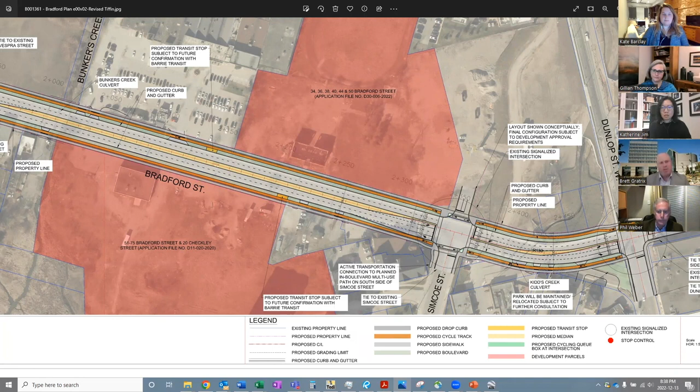So not probably the answer you're looking for, but that's kind of the state of the union on that. Yeah, there may be some things we can do with an interconnected signal network, but there's only so much we can do.

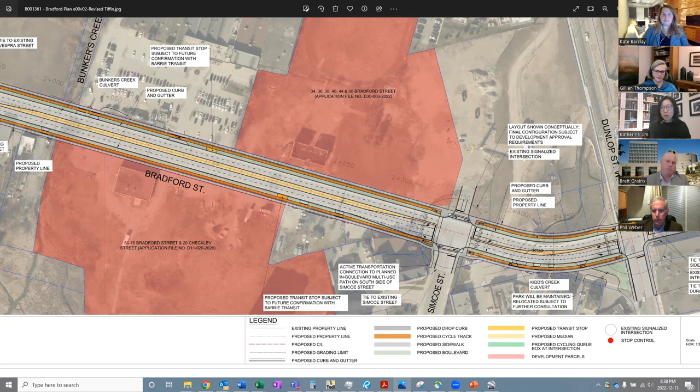Now this is our final question that just came in. The question is wondering why we would still be considering electrical wires above when we have difficulties in our type of climate. Why not just put wire in electrical boxes right from the start, doing it right the first time? Again, I think this is related back to the potential of burying some of the hydro wires, and this is a potential that during detailed design may be reviewed with Alectra.

Oh sorry, I was just going to ask Katherine what did Alectra say about the cost premium of burying? I'll have to go back to my notes, but it is something quite significant. But at the same time, like you said earlier, this is not something that we would be making a decision on specifically during the EA.

So, but it is something that we will be incorporating in our response or our comment record. And just a bit more commentary. I absolutely understand the aesthetic standpoint, I totally agree with that. One of the challenges on the Bradford Street corridor, and this doesn't mean it won't happen, it's just commentary.

The higher voltage lines, which are on Bradford Street, are much more prone when they're underground to issues with breaking. And then to repair them, they're actually more costly from a life cycle perspective, even if you account for some sort of storm damage. Now, I don't have a complete analysis of what Alectra's done, but that's just kind of anecdotal. We'll of course look into that more detail, but once you get into it, it's much more nuanced than just agreeing they're very ugly — there are challenges, especially with those lines and the functionality of feeding the wastewater treatment plant as well and having that redundancy. So it's a multifaceted problem, but one we'll definitely flag as a big public interest to look into burying those.

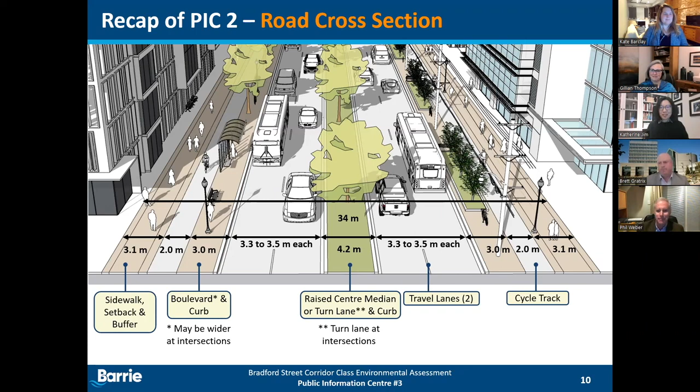Great. Thanks, Brett, for speaking to that. So with that, I think that's all the questions that we have from this evening.